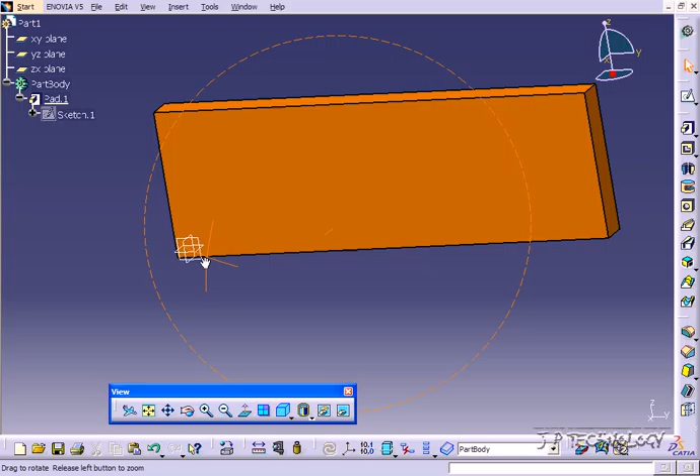In this case, we're going to cut into this plate, and then use the edges to pattern along. We'll also create a sketch, just one sketch line across here, to also pattern along. So to start off, let's create our first feature.

Let's click this face, click Sketch, and sketch a circle. Just click, sketch a circle in the middle, and let's dimension this to 10 millimeters.

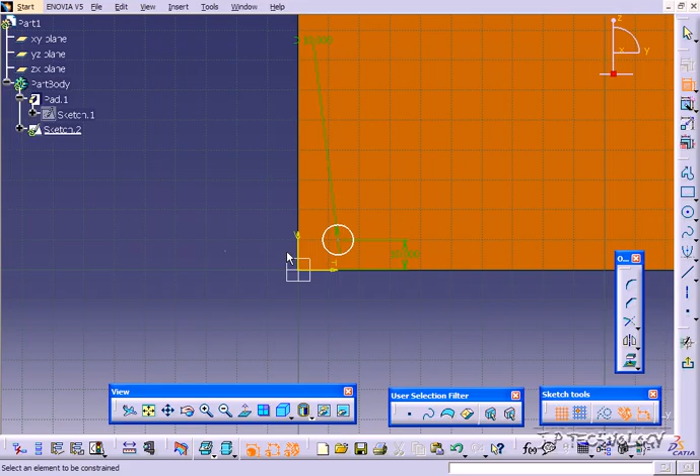Let's position it in the bottom left corner, and we'll dimension it to 10 by 10 from the edges. So from this edge to the middle, make it 10, and from the vertical edge to the center, we'll make that 10 also.

Now that we have our sketch, let's exit the workbench, and use the pocket feature to cut it out. Click Pocket, click the sketch we just made, click OK, and now we've made our first feature that we're going to use to pattern.

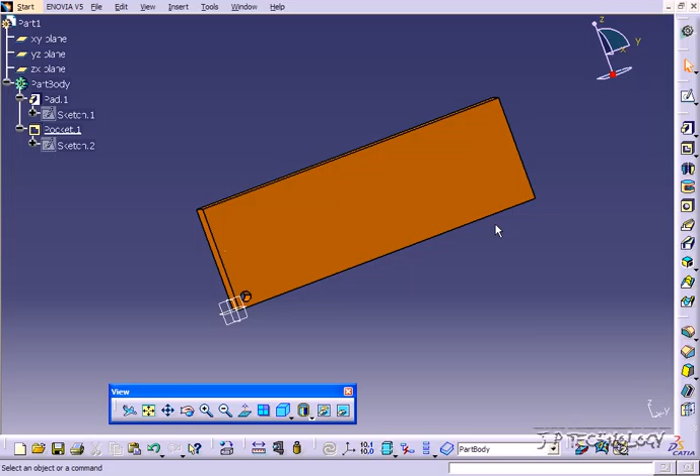We're going to take this feature and pattern along this edge here, and that's going to be our first pattern. So let's click Insert, Transformation, Rectangular Pattern.

Now we have the rectangular pattern definition box, and you can see we have a few things we need to fill in right now. The first one I'd like to put in is the object to pattern.

Click on there, and you can either select by clicking on it in the part or clicking on it in the tree. I think clicking from the tree is a lot easier because you won't click on another part by accident, and it's a lot more precise. So let's just click the pocket.

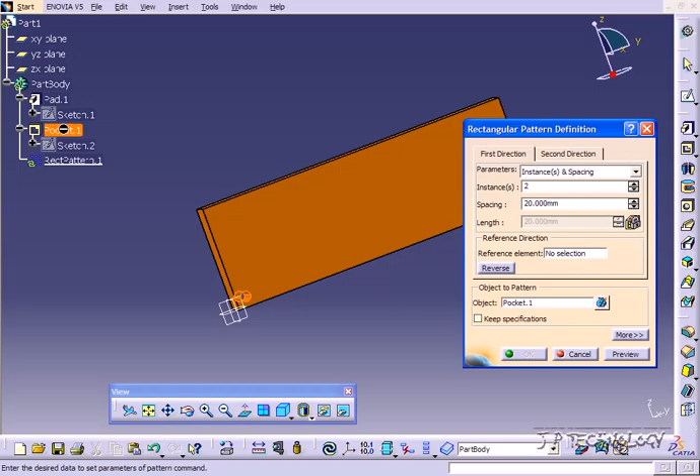Now for the reference direction, we're going to have to choose a line to pattern along. So we're going to do the bottom edge here. Let's click this bottom edge here.

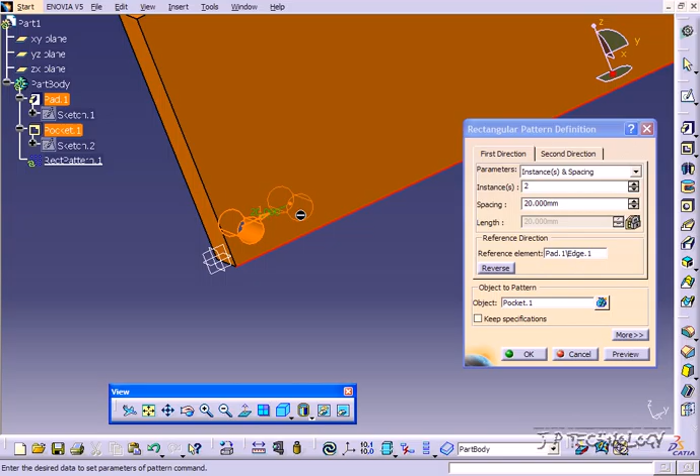You can see that from the rectangular pattern and the settings already in the definition box, it's made another feature right beside it. Right now the instances are at 2, and what we have to do is keep increasing them. As you increase, it's going to increase the instances, and as you increase the spacing between each instance is going to increase also.

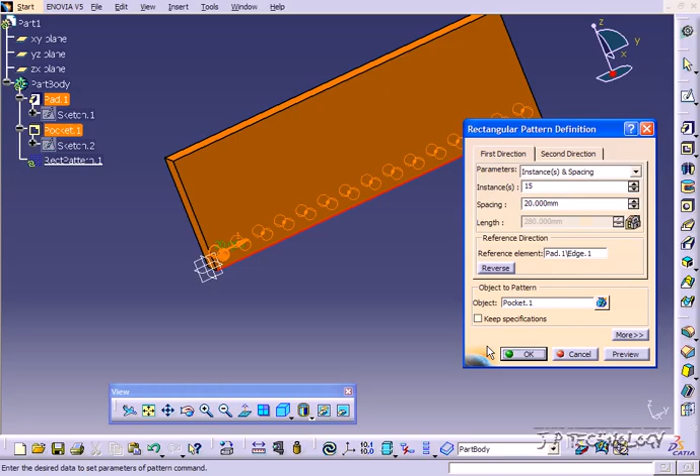So let's put this to 20, and let's make 15 instances. Click OK, and you can see that it runs all the way across. Click OK again, and now we have our 15 instances, and our rectangular pattern going along the bottom edge.

Now let's do the same thing, but on the vertical edge here. Click Insert, Transformation Feature, click the rectangular pattern. Now let's choose the pocket again, and let's choose the reference direction.

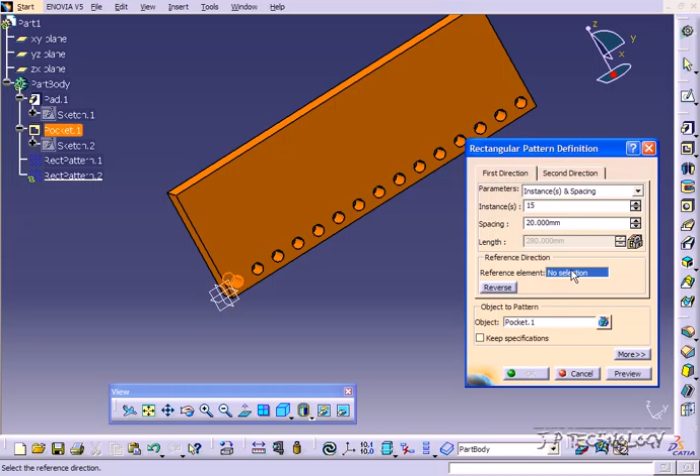We'll choose the vertical edge here, and you can see right now in the preview it's going in the wrong direction, so we're going to have to flip it. You can either flip it with this arrow or flip it with this reverse button.

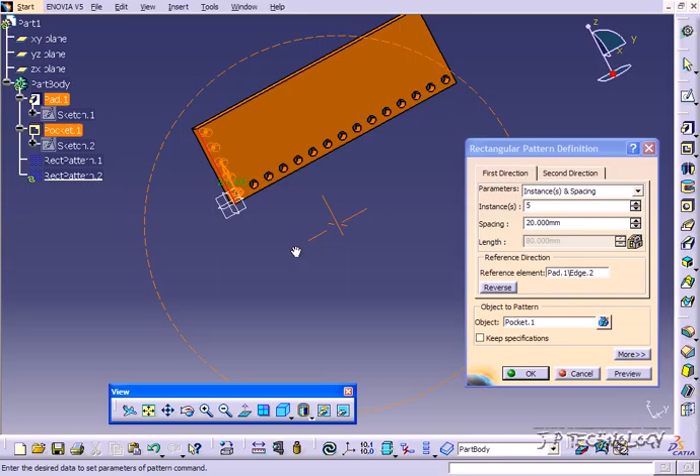So put it in the right direction, and we're going to need 5 instances. Click Preview, and you can see the preview looks good. Click OK again, and now we've done it going on the vertical edge.

Now if we delete this rectangular pattern, we can actually pattern an existing rectangular pattern also. So we're going to pattern all of these going up to fill up the whole plate.

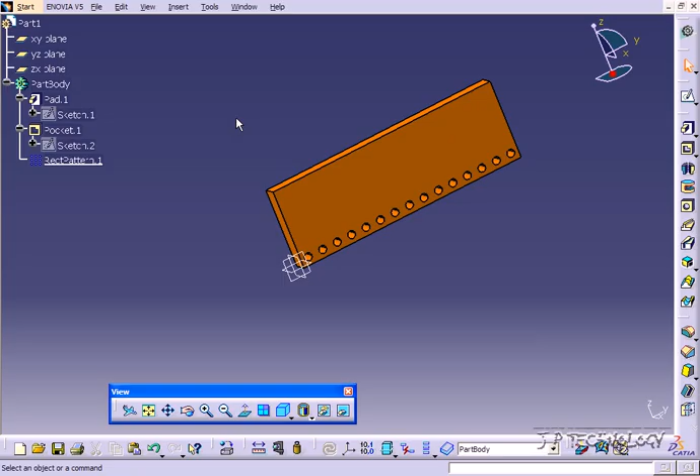Let's click Insert, click Transformation Feature, Rectangular Pattern, and our object to pattern is going to be the first rectangular pattern, and the reference direction is going to be the vertical line.

Let's reverse the direction, and it looks good. Everything's in the right direction, everything's cutting in. Let's click OK.

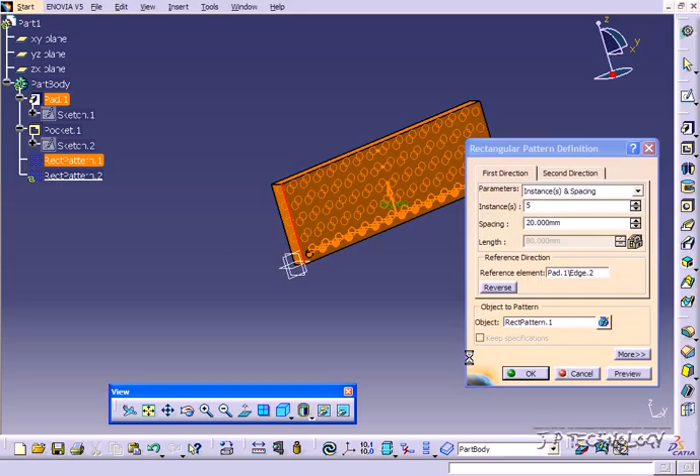And now we've cut into the plate using the rectangular pattern. So we've patterned an existing rectangular pattern to fill up the whole plate. Now let's delete both of these patterns.

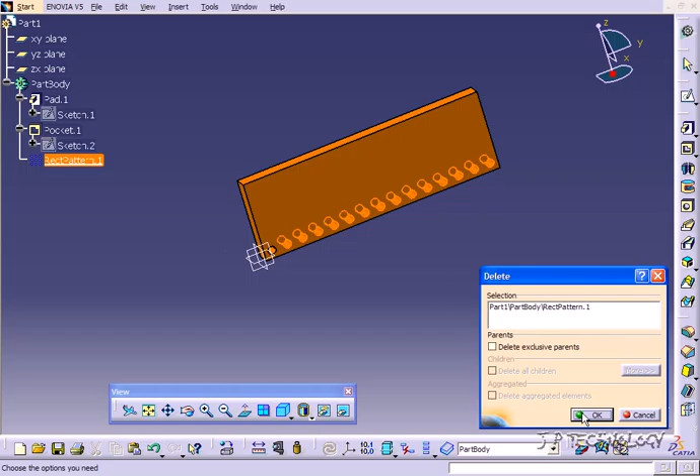And what I'm going to do is do that exact same pattern we just did, but we're going to do it in one step.

Click Insert, Transformation Feature, Rectangular Pattern, and let's choose the pocket.

Now let's choose the first direction, so we're going to make it go along this line. Now we're going to choose the second direction. In the first ones we've been doing, we've only been doing one direction, but you also have the option to do two at the same time. So let's click the second direction.

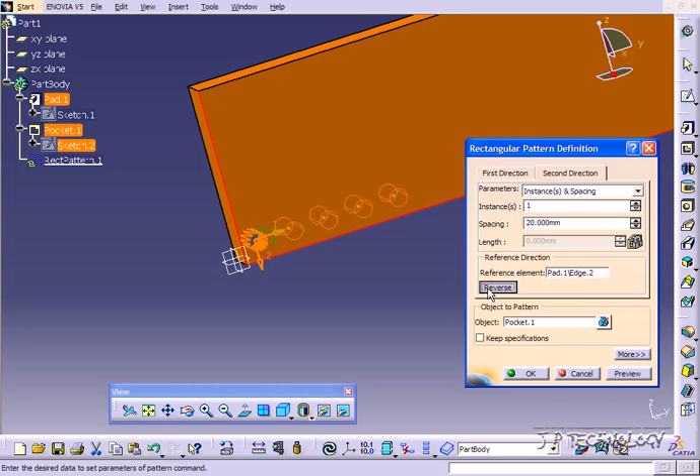And let's click this line here, and we'll just reverse it and increase the instances to 5 so it goes all the way up, and we'll put these to 15. Click Enter, and you can see that just with one single rectangular pattern, we're able to go horizontally and vertically.

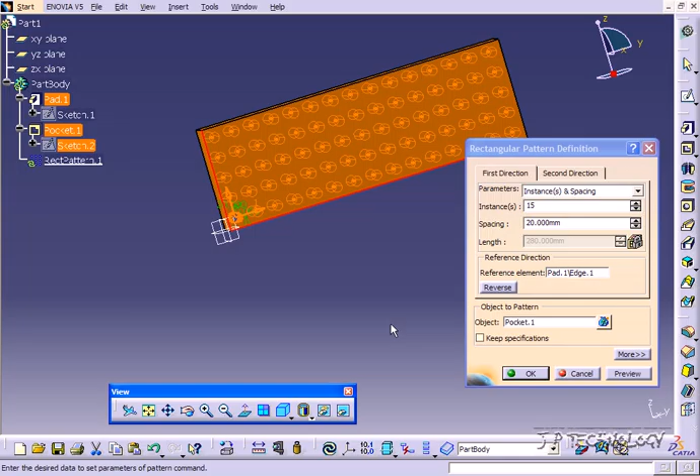And fill up the entire plate. Now let's click OK. And now we've done our rectangular pattern. From one feature, we've created multiple features on this one plate. So from the one feature, we've been able to use the rectangular pattern and pattern the entire plate.

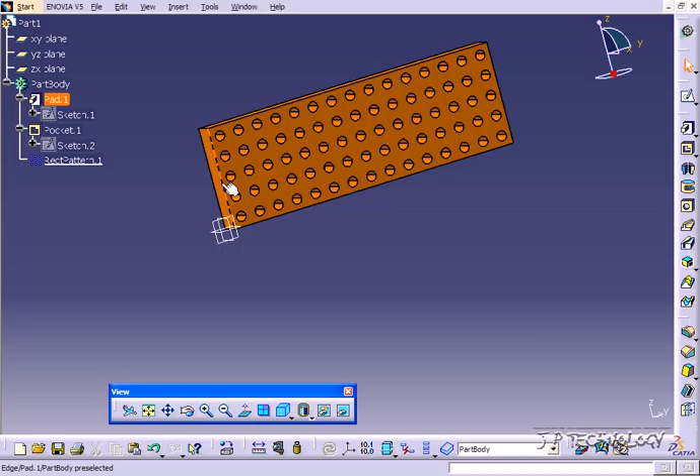Now, right now, all we've been using is the edges of the rectangular plate. So let's delete this rectangular pattern, and let's use a sketch as our definition line, so our path to follow. So let's click this face, click Sketch, and from the origin...

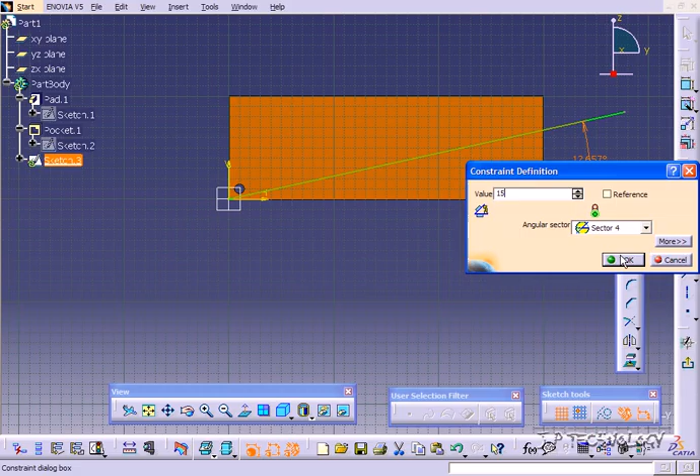Let's just draw a line straight out, and let's dimension this with an angle. Right now it's at 12 degrees, so let's put it to 15 degrees. Click OK, and let's exit this workbench.

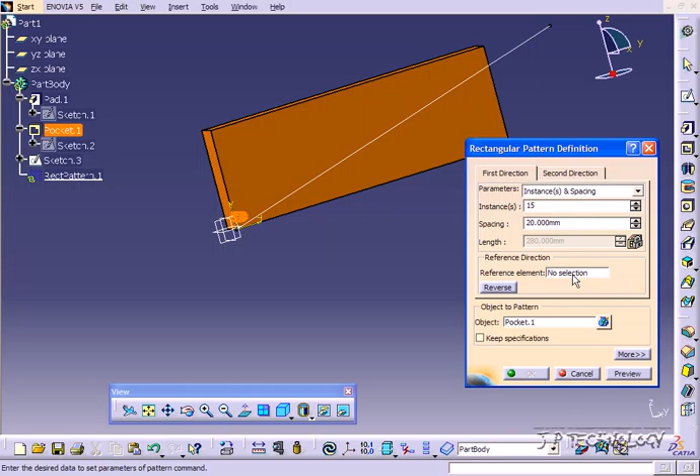Now what we're going to do is pattern along this line here. So let's click Insert, click Transform, Rectangular Pattern. Now we're going to select our pocket, and our reference direction is going to be this line here.

And you can see that rather than following a straight line, kind of like on a 90-degree angle, what we're doing is we're following this line that's on the 15-degree angle. Now we'll click OK, and we've made our pattern on an angle.

Now these angles, they have to be a straight line. It can't be a curved line, so it's not going to follow that. With the rectangular pattern, it's only going to follow a straight line.

Now we're also able to edit the sketch of the line. So by moving this line, it's going to move the pattern when we rebuild. So let's double click on the line.

Double click on the sketch, and let's change this to 20 degrees. Click OK. Now when we rebuild, everything with all the circles are going to follow this new line rather than the 15, and you can see how it's adjusted and moved up there.

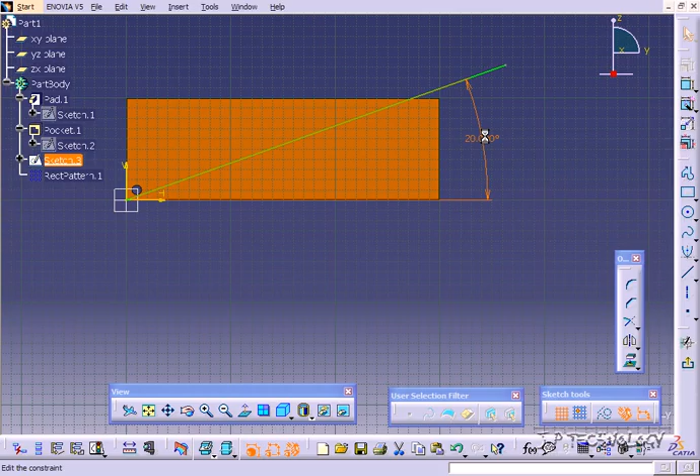Now let's double click on it again. Let's make it 5 degrees this time. Click OK, click Accept, and you can see now that all the circle patterns are going on that 5-degree angle.

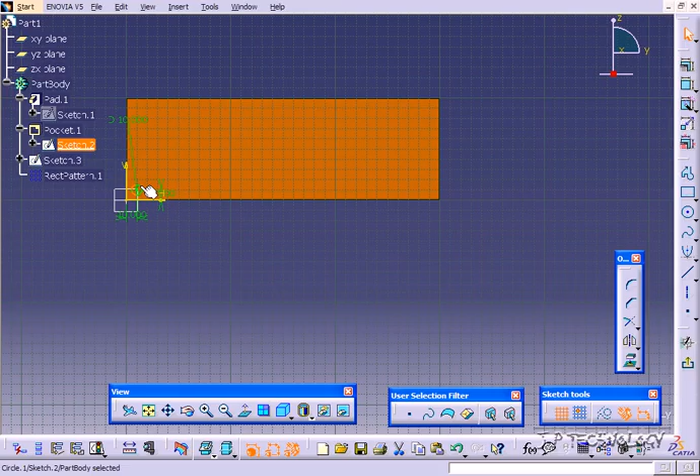Now if we change the original sketch, we're also able to change what the output's going to be. So let's just delete this circle, and what I'm going to do is draw a little square, and I'm just going to draw it around the center of that circle point there.

So I'm going to exit the workbench, and now you can see that rather than the circles, we now have squares. So you're able to edit the sketch from the original pocket or extrude that you made, and it's going to allow you to update your rectangular pattern automatically.

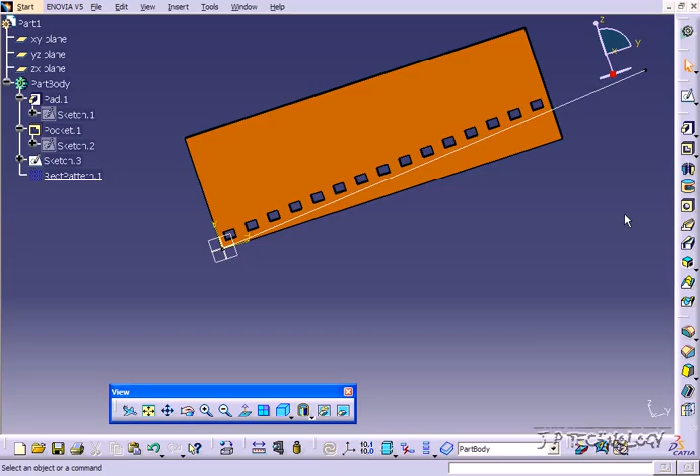So in this tutorial, we've gone through creating the feature and creating the lines that we're going to use to create our rectangular pattern. So to do the rectangular pattern, you need the feature and you need the edge for it to run along. And that concludes our tutorial on how to use the rectangular pattern feature within Catia v5.